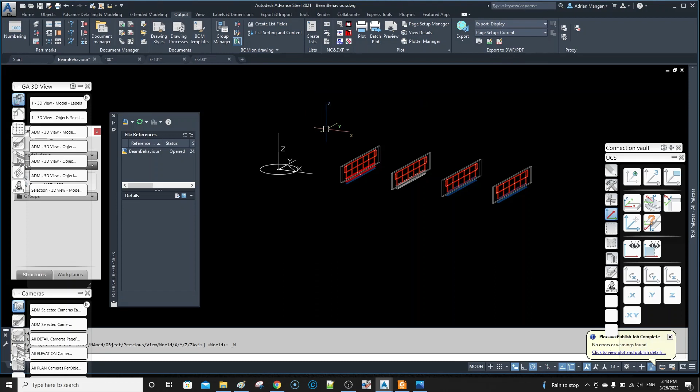Hello. So here's a good one that you may not have come across before. It's a new one for me. I'm hoping to be able to get some help with this.

So if I draw a column in here, actually let me turn everything back on. So let me just draw a column in here, and I'll use the regular column command, which I don't usually use. Just good practice. Check that.

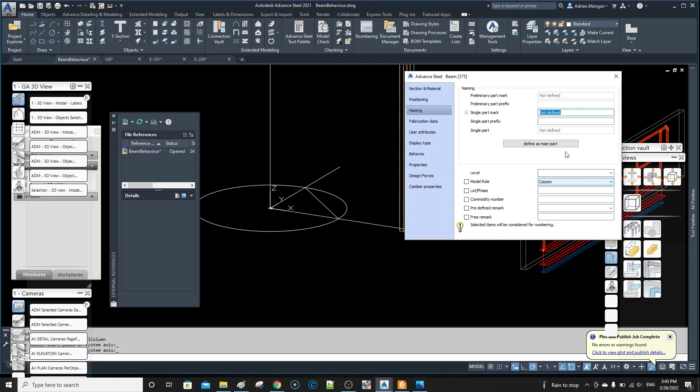All right, so now if I put a base plate on this, let's go to connection vault, base plate. I'm going to put a base plate on this. Do you want to know, I don't want to add additional concrete object. So we're going to come in with some sort of base plate here, right? Doesn't really matter the size, but let's just edit it a little bit.

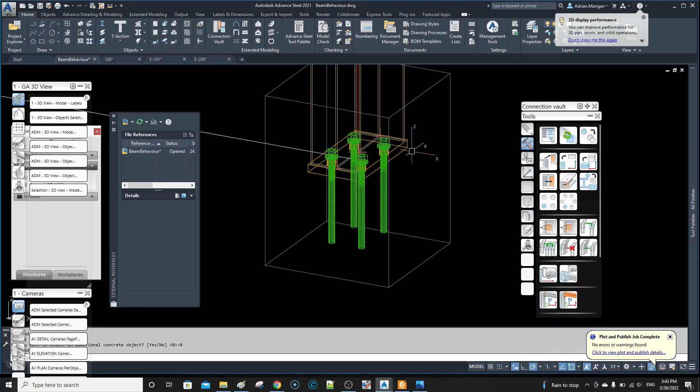So let's go inside. Let's say I want to have 1.5 inches of grout underneath this plate, and I want the plate to be 1 inch. So I'm gonna have a value of 2.5 to bring it up 1.5 inches.

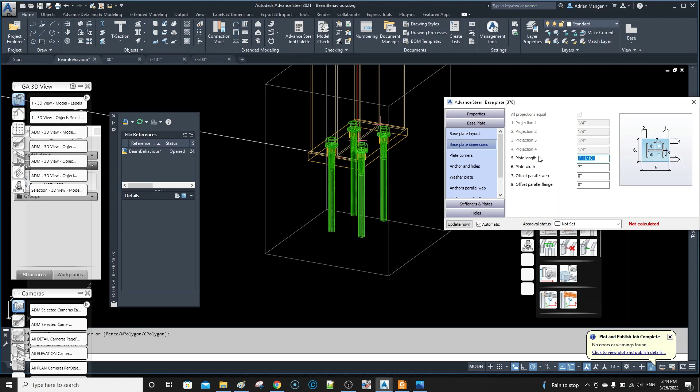And then let's say the plate dimensions are 1/4 inch. So we're gonna do total, go back to the plate dimensions, and we'll do 20 inches. So 20, we'll just do a big one so we can see it better. 20 by 12, and then we'll do the anchors.

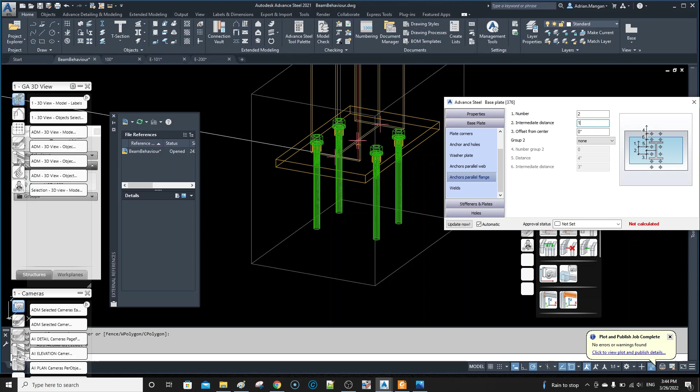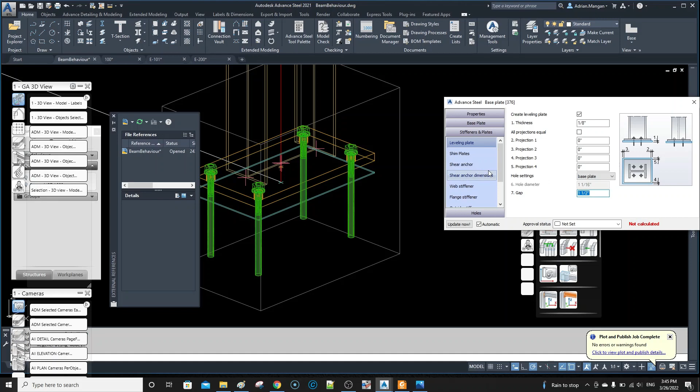And then we say we want to have a leveling plate underneath this, so that's fine. So let's go to our leveling plate, stiffeners and plates, leveling plate. We're going to add a leveling plate. We're going to make it 1/8 of an inch, and then we're going to move this down the gap of 1.5 inches, and that's where our grout's going to fit in the middle.

So for one thing, we now notice that the plate's a weird color, right? Now, I don't know why this is happening. So if I click on that, it's coming in as a stairs. So the other problem then is, for some reason, when I click on this naming, it's coming in as a landing plate. Now, that's fine.

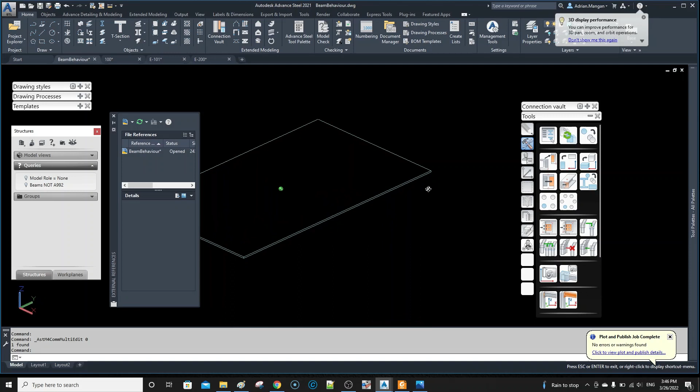So my first thought was, well, maybe I've edited out the leveling plate because it should be a leveling plate. But also, there's no holes in it. So even if you change the presentation of it, there's no holes in it. So I don't know if anyone else has come across this issue. You can see there's no holes in it.

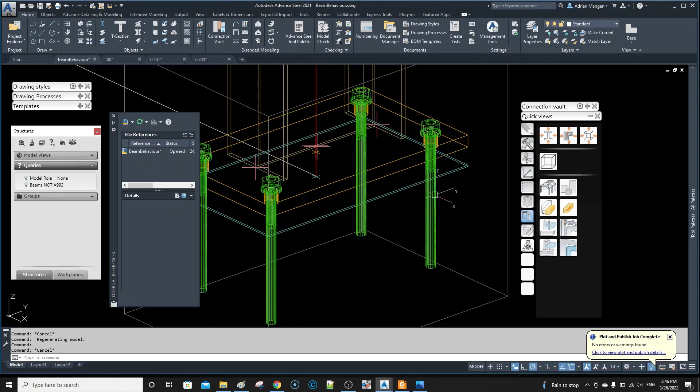And then the other issue is, so there's three issues. This is on the wrong layer. This doesn't have the right model role. It doesn't have holes in it. So that's three issues. And then if I click on this anchor and we go to the naming of the anchor, it's wire mesh. So my anchor is coming in as wire mesh.

So obviously this is something that I've messed up. So just wondering if anyone else knows what I've done wrong.

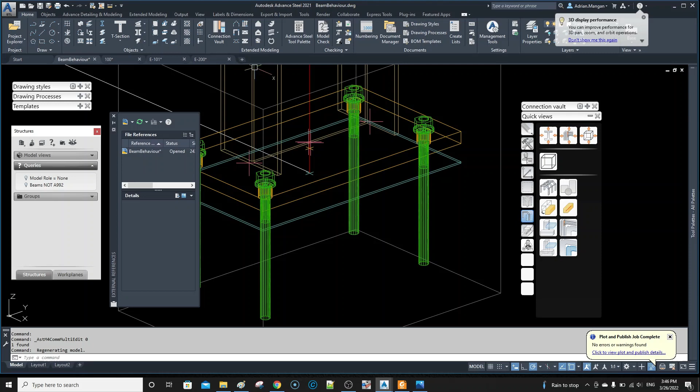I'm assuming that, because if I explode this joint and we go in and look at this plate, that's the only way I can change this. If I go down here and do L a couple of times, you can see I have a leveling plate in here. I think the problem might be that...

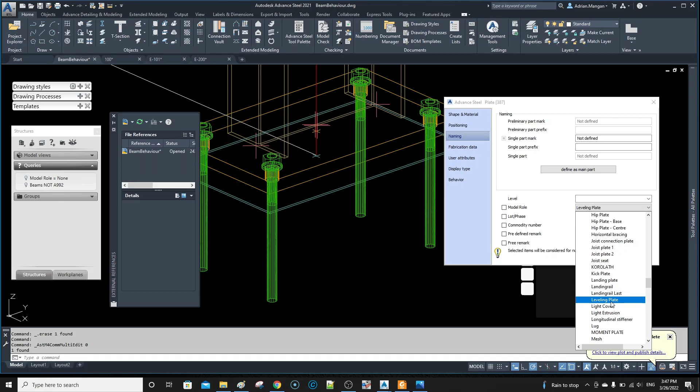I think I've changed this leveling plate. I think that leveling plate should have a small p there, and I think that's what I did wrong. I don't know if that's what I did wrong. So let's just try, I guess. I know I'm wasting more time now as usual.

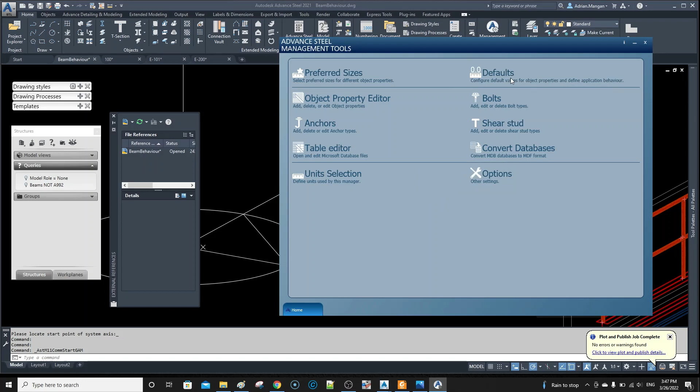So let me go and put in another column here. That's probably what I did. It looks like I edited that leveling plate and I made it wrong, and now it's not recognizing it. So let's go back, sorry, to model roles, object property editor, model roles, landing plate. So let's go down, and we have leveling plate.

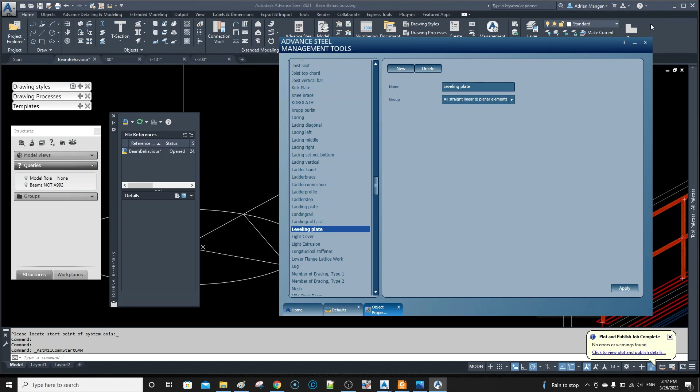Now if I could change this, it seems to have changed it. So maybe that'll work. Let's update our defaults, and now I should have copied that first, right? So I should have created a library, an entry in the library for that.

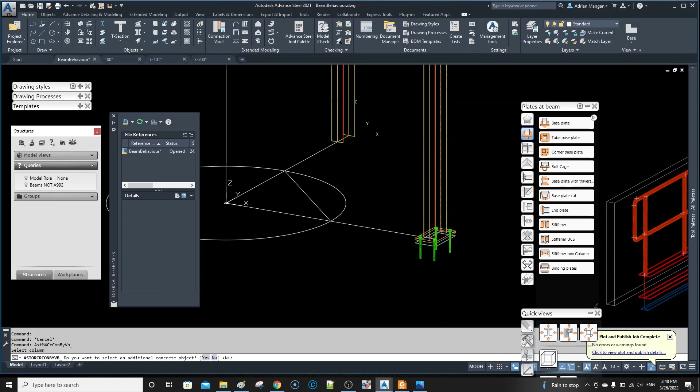So let's just do another one. We'll put this. All right, so now let's see. We'll just add the leveling plate. Sorry, I don't know what I'm clicking on that for. So let's do the same thing.

Value of 2.5. Let's just put the plate in. We won't bother moving anything, obviously. Leveling plate.

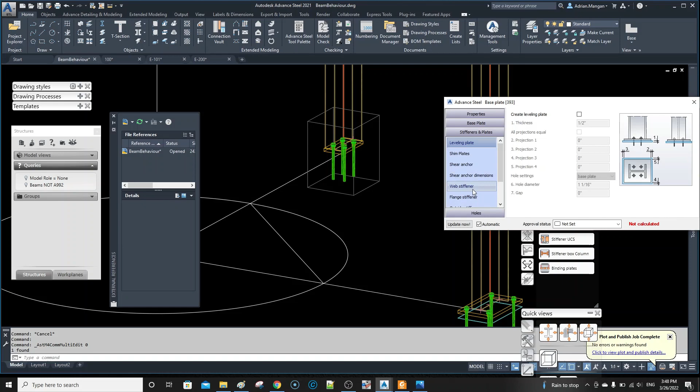Oh, and it's still the wrong color, so I guess that wasn't right. Alright, so leveling plate, and then I want it to be 1.5. And it still doesn't have the holes in it, so now if I close this out, double click on this naming, it's coming in as leveling plate, so oh no, it's still coming in as landing plate.

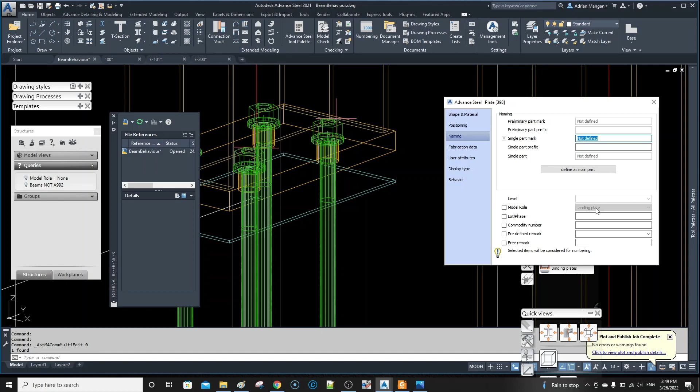I don't know, it's probably an entry somewhere inside in it. I'm sure there's a couple of people smarter than me that know what I'm doing wrong. But again, it's also super weird that the anchors are coming in as a wire mesh. I don't know.